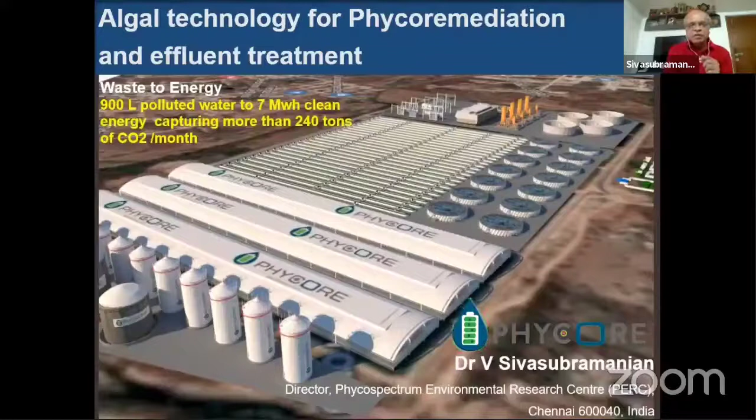So 2 weeks back I was traveling in Rajasthan. We have projects in Kota and also in Jaipur. In Jaipur, we have introduced our algal technology, and I'll talk about it later if there's time. We also have an algae-based pilot plant in DCM Shriram Limited in Kota. I think somebody's in the audience, I saw somebody from Kota. I was there in Kota 2 weeks back, and I've been traveling to Kota even before COVID. Because of COVID we couldn't come, so the first visit was 2 weeks back.

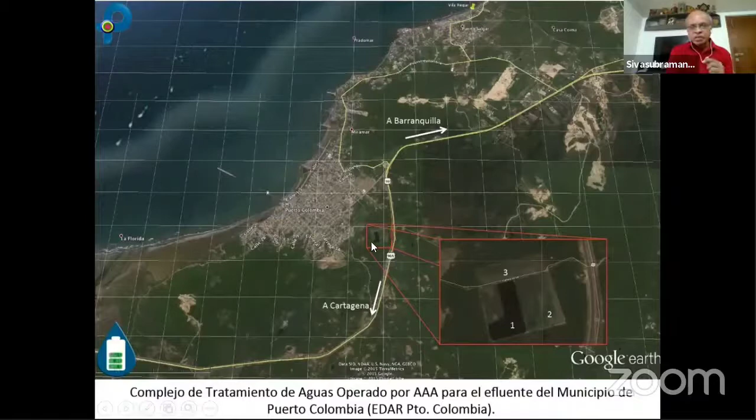This is another project we just started in Colombia. You can see a small city here called Puerto Colombia, and this is the Caribbean Sea, going to Barranquilla and Cartagena. There's a sewage treatment plant here, enlarged to show the details. We have isolated microalgae from all 3 ponds of this sewage treatment plant, and all 3 ponds have different compositions of algae. We are studying this, and we'll be entering into an agreement with this city to treat it.

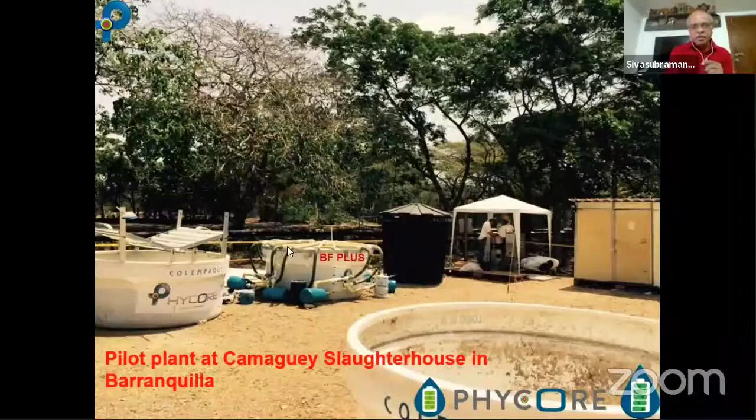We have done another project in Colombia, a Camagüey slaughterhouse in Barranquilla, where we introduced one of the reactors called BF+. I'll explain later what BF+ is. This was done very successfully, and we treated the effluent, and the biomass is now used for a bigger version coming up in Colombia, where we are treating the effluent and making biomass. I think you can see the biomass here.

The normal brown coal has 3.5 calorific value, calories per kg. Industrial effluent biomass has got about 3.4, and domestic effluent is about 3.8. So we are able to get biomass with a higher calorific value in Colombia.

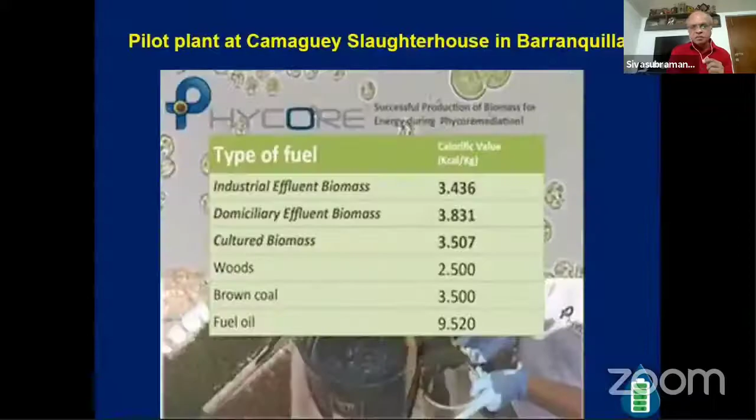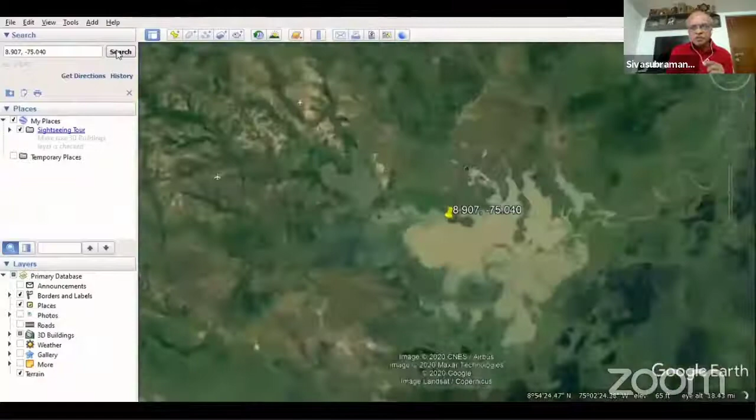This is the very latest picture you are going to see, a video running. You can see the Google map which has a video loading. So now you can see, last March I was there just before we shut down for COVID. I was there in Colombia.

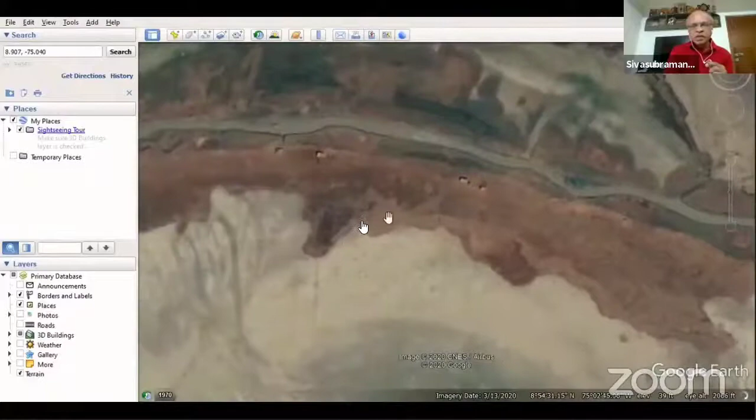So this is the canal here, and that goes to a big swamp here. I can see a big swamp, and this big swamp. I'll show you the next picture.

So we actually met these local people to tell them what we are doing, because in Colombia you first have to convince the local people what you are doing. Only then can we proceed with whatever we want to do on a large scale in the water body.

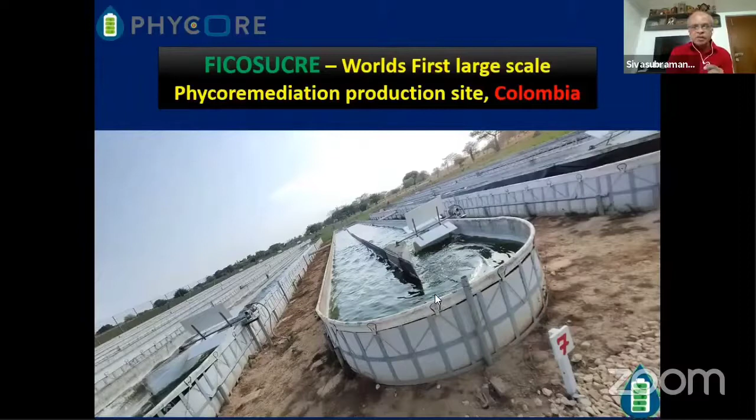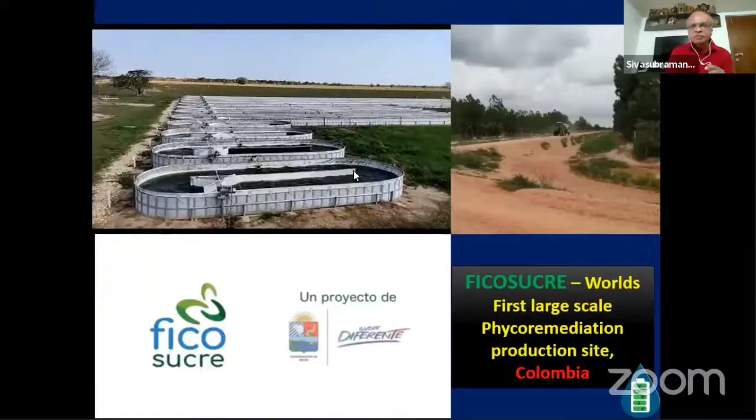This is supposed to be the world's first large-scale phycoremediation production site, where we will be growing algae collected from various sites, and then produce the biomass. You can see the facility here, and we take this algae in this... this is in Spanish, don't worry.

So we are using this tanker - it's an aerial view. We have a huge facility in Colombia where we will be producing the algal biomass, and then take it in big tankers and put it back in the wastewater.

The idea is, there are two types of algae, the beneficial algae and the harmful algae. So we try to minimize the harmful algae by increasing the number of beneficial algae, collecting them and putting them in a culture facility, a growth facility where we dose a lot of materials and nutrients, and grow them. Then we take this concentrated biomass and put it back in the wastewater, where they will be fighting the harmful algae, and also taking up the nutrients very effectively.

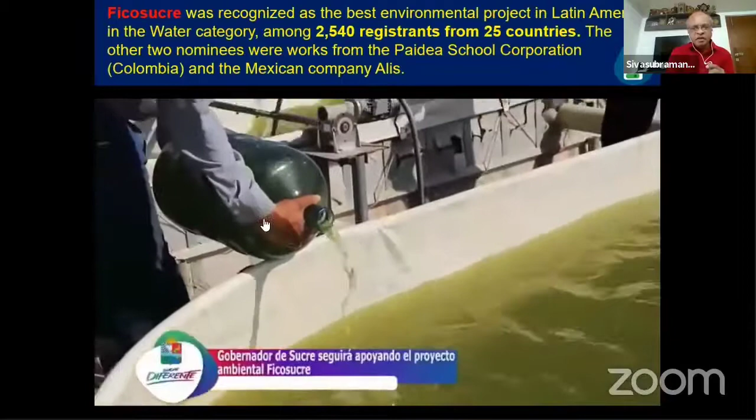After we became the winners, we became popular, and a lot of people started visiting our facility - the mayors and the local people. This is a TV commercial. This is when the governor of Sucre visited our facility, and this came in the news - a news item on TV where the governor himself is explaining our project.

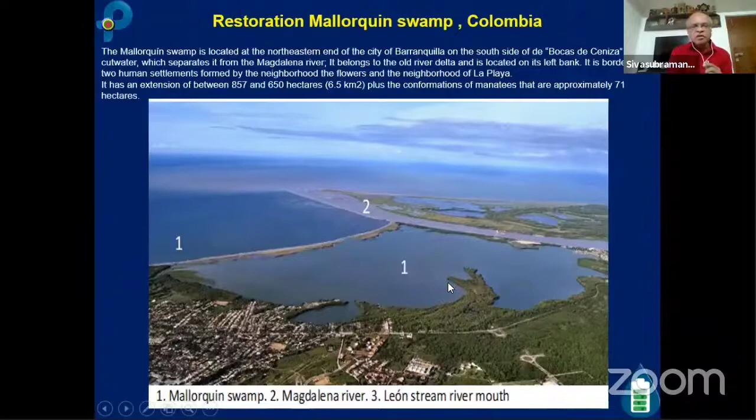Another project we just started in Colombia is swamp restoration. This is a big swamp you can see here, near Barranquilla city - the Mallorquin swamp. This is the Caribbean Sea, and this is a big river, the Magdalena River. It's situated between the Magdalena River and the Caribbean Sea, called the Mallorquin swamp. This swamp is now being cleaned up, and we have already started our project.

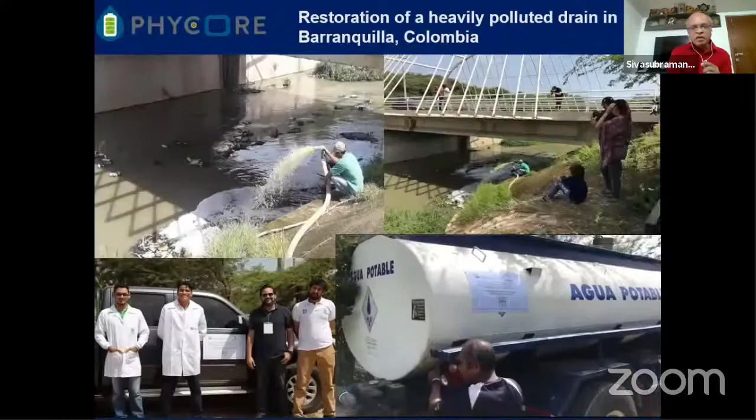This project has been very successful, and we also started cleaning up the small waterways that dump their waste, using our technology. This came in the newspaper also.

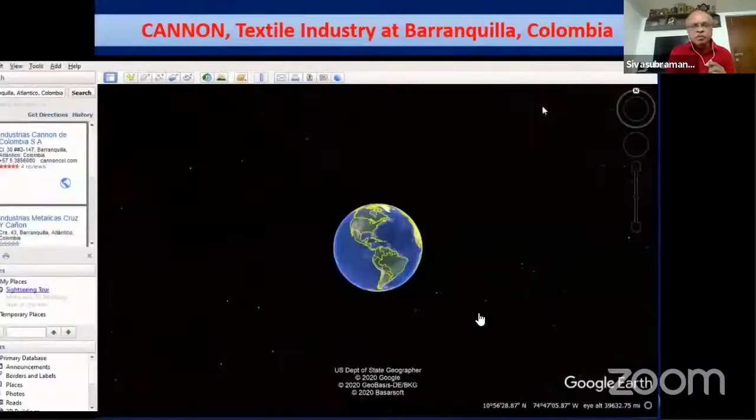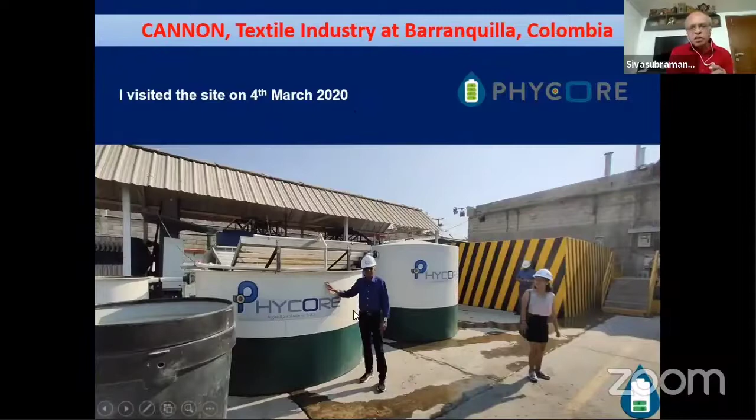This is another project we just started in one of the industries in Barranquilla, called the Cannon Textile Industry. I visited on 4th March. This is our reactor. Its importance is that this is a continuous process, first time in the world, with very good reduction of BOD, COD, color, and toxicity.

You can see the various samples. This is a raw sample, and when it goes through the system, at the end it is almost transparent, and all the BOD, COD, color, and toxicity have been reduced to a very low level. I think for the first time we have made a continuous process; otherwise you would only be doing a semi-continuous process. I'll explain this later.

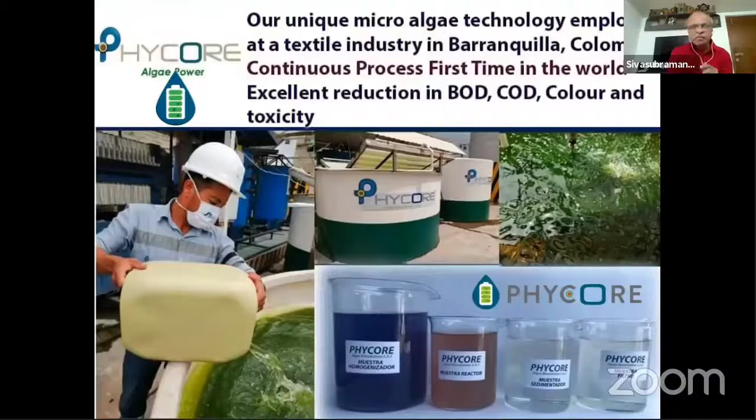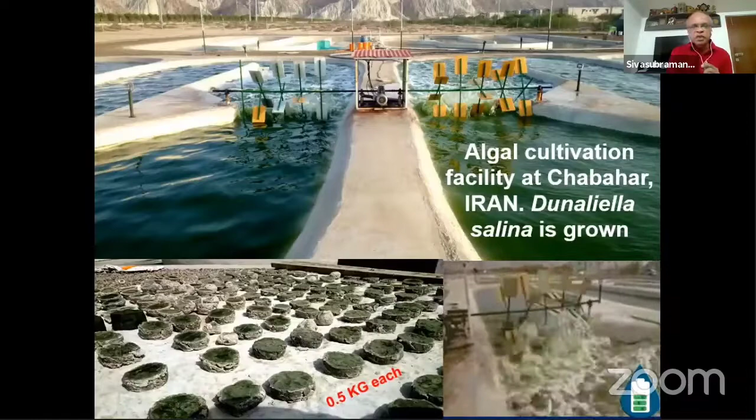There is a time gap, and this is another project we just started in Iran to produce Dunaliella, and we are also involving local industries to supply their flue gas so we can grow this biomass very effectively. Another project we just started in Wales, UK, where we have this partner.

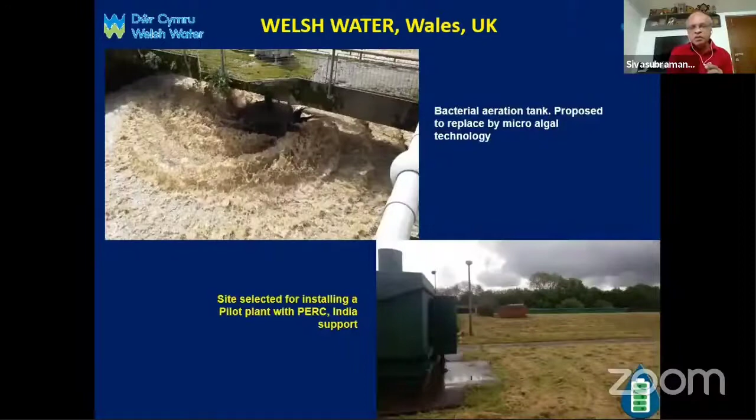This is Dr. Tajuddin from India, this is me, and this is Carol and Ella from Swansea University. They are with us, and we'll be taking up this project for wastewater treatment using microalgae. This is another visit we made to Port Talbot Steelworks, which Tata Steel has.

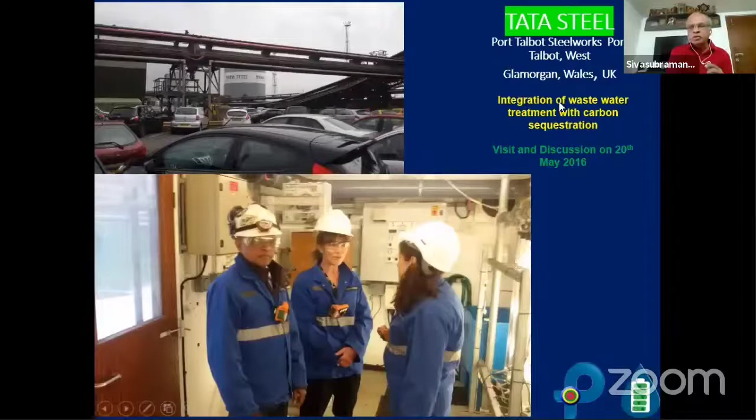After coming back to India, I was invited by Tata Steel to look into their problem in Jamshedpur. They have a big problem with color, cyanide, and ammonia removal. When the sample was sent to our laboratory in Chennai, we were able to remove the color and bring down cyanide and ammonia within 4 hours. This is after 4 hours of treatment.

This is the pilot plant we just started there, and it is almost under completion. This is where we are going to scale up.

This is the aerial view of the sewage treatment plant, a wastewater treatment plant. These are all railway tracks inside, and this is where we are going to intervene. This is a big system, about 8,400 meter cube, a huge system.

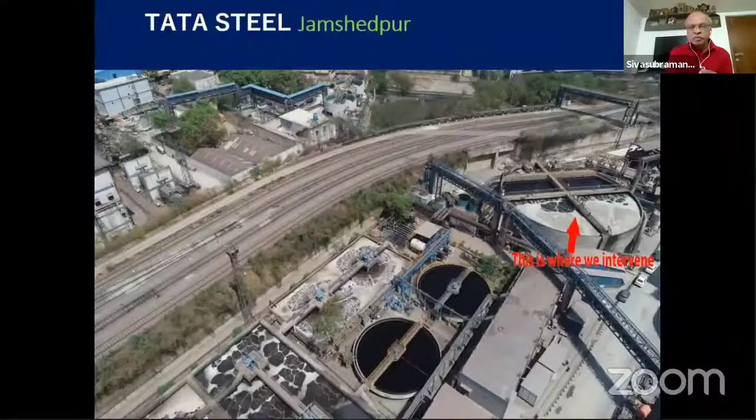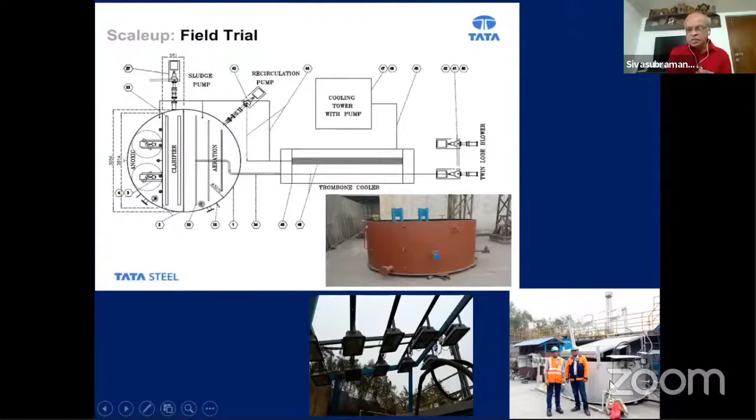We made a smaller version of this big system with all the pumps, inlets and outlets. We also fixed artificial lights. This is the 8,000 liter pilot we have completed, and it was really successful.

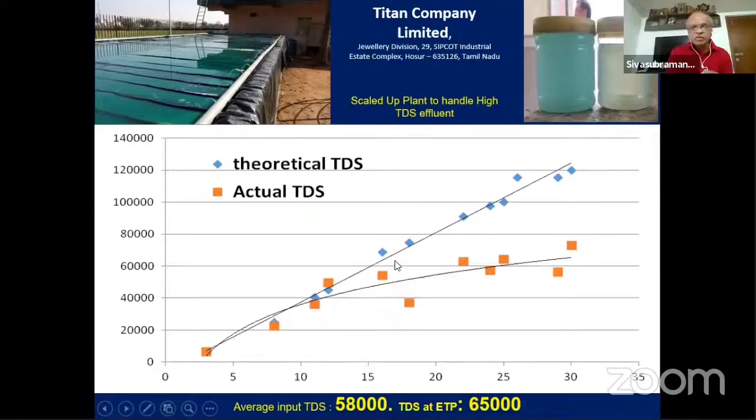In fact, we did another project in Tamil Nadu, in Titan, where we were able to treat effluent with about 58,000 TDS, and the TDS in the ETP goes up to 65,000. It's an evaporation process where we are able to remove the TDS, and this is the scaled up plant we put up in Titan, the jewelry division, part of the Tata company.

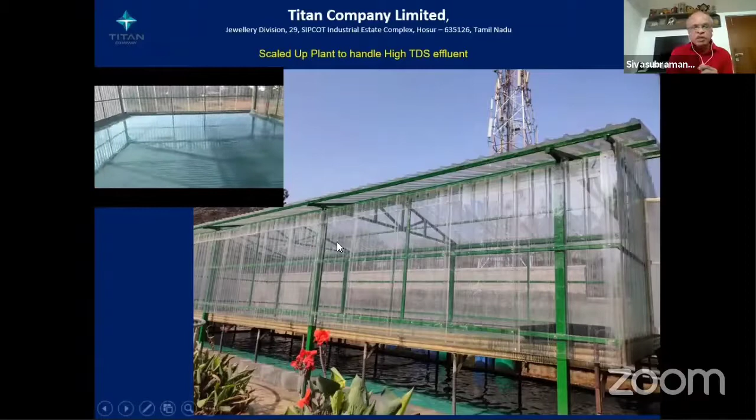This is a 40,000 liter pilot plant we have started. This is an evaporation surface, surface 1 and surface 2. We are actually adding 5,000 to 10,000 liters to the 40,000 liter tank here. I will explain the process a little later.

We are also working on other projects like lakes, ponds, rivers, and streams, and other evaporation treatment in India and other countries.

So this is basically the algae power. The diagram explains it: it oxygenates water, eliminates waste, degrades organic and inorganic pollutants, eliminates all harmful bacteria, and promotes biotic life in a natural way.

This is what we are actually putting into natural water bodies, because when you compare a natural water body and industrial effluent, the treatment is completely different. For industrial effluent, we give 99% artificial and 1% nature, whereas in a natural water body, river, pond, lake, or swamp, we give 1% artificial and 99% nature. So this is basically our technology—we have developed a product called Phycoplus.

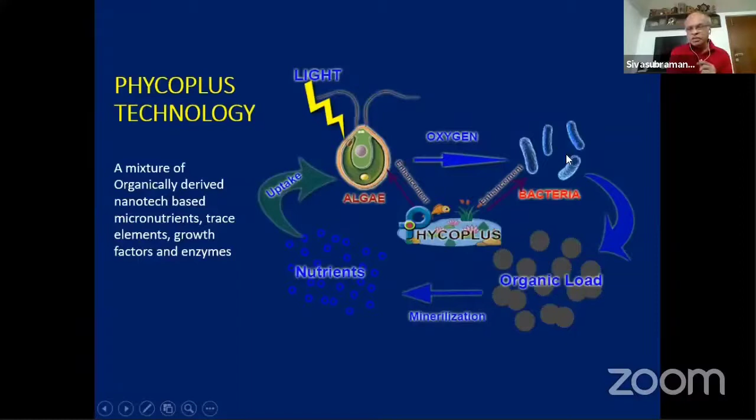It's a mixture of organically derived nanotech based, micronutrients, trace elements, growth factors, and enzymes that, when applied, enhances the production of algae and bacteria. The bacteria degrade the organic load and are mineralized, and the minerals are taken up by algae. Algae, using light, taking up nutrients and fixing carbon dioxide, evolves oxygen, which is taken up by bacteria. This is the cycle we are talking about in the technology we normally use.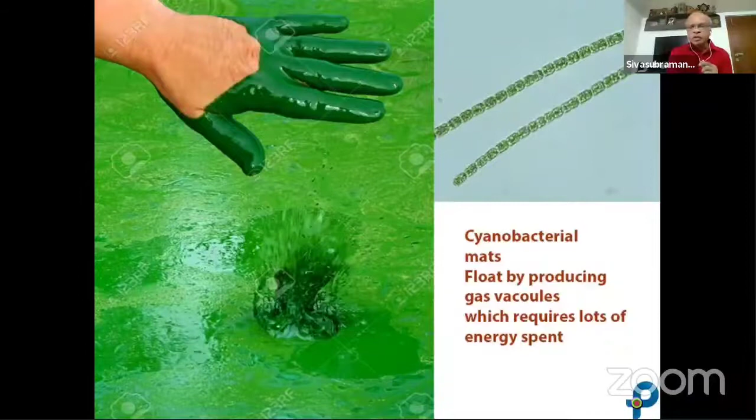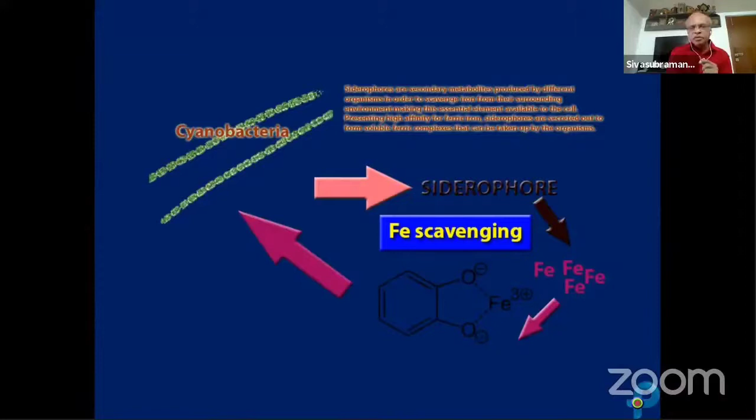In lakes, normally you will see bacteria growing in large numbers, completely covering the surface and cutting the light. I think they also produce siderophores that scavenge iron, and this iron scavenging makes cyanobacteria dominant and prevents other algae from taking up iron. So iron is completely cut off because of this iron scavenging by cyanobacteria.

So we remove this cyanobacterial and duckweed mat with our technology and allow the light to penetrate. Once the light penetrates, water becomes transparent, BOD and COD become low, oxygen levels are optimized, coliform and other harmful bacteria disappear, and the normal food chain is restored. So this is what we do.

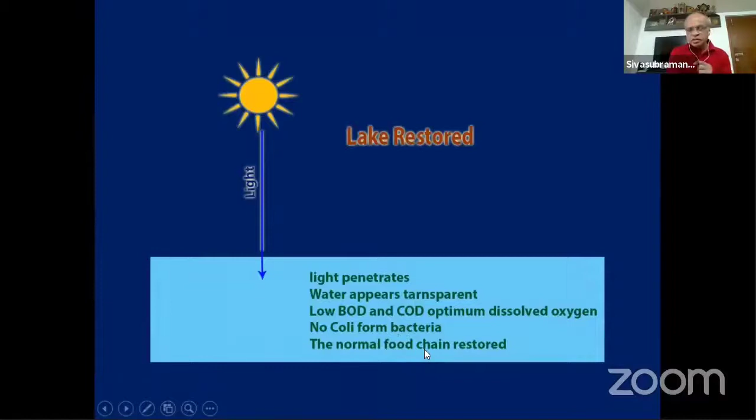This is what we started in North India. Near Aligarh, we were given a project to restore a lake.

It's a lake, you can see on the screen, and when we start adding our product along with the microalgae we are growing there, with our Phycoplus, you can see this before and after. Before, it's completely covered, the water is black and foul smelling, and after a week or so, you can see the water becoming transparent, and you can see the bottom of the lake.

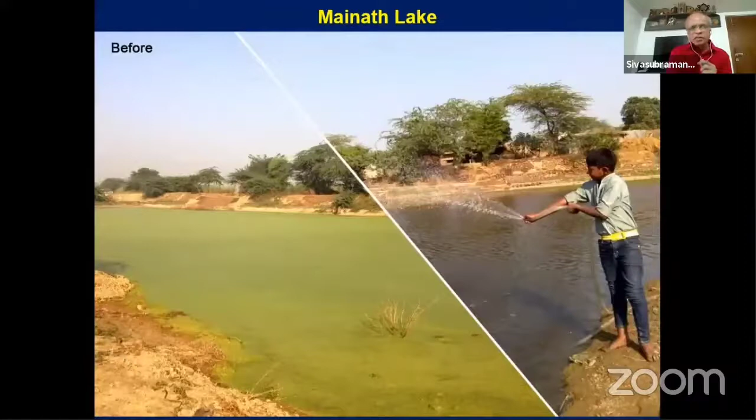The cyanobacterial mat has completely disappeared. And if you look at the parameters, BOD, COD, and especially E. coli and total coliform bacteria are completely gone, and the water becomes transparent and restored.

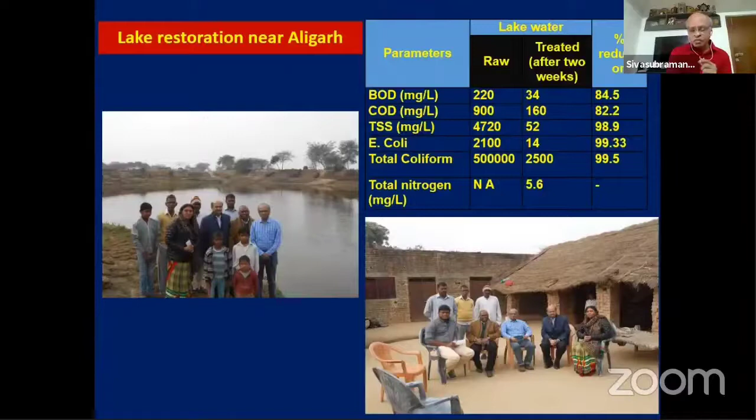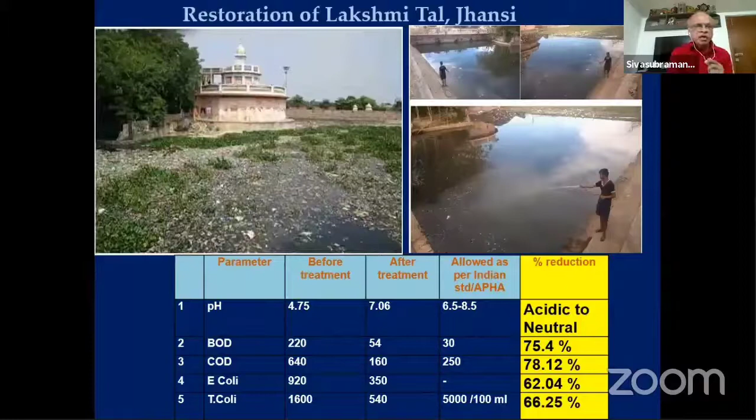So this is what we demonstrated near Aligarh, for taking up a project under the Ganga Mission. But the Ganga Mission people said, okay, you have done something with the pond, but the Ganges is running water, we're talking about a different scale. So we did other projects in temple tanks as well.

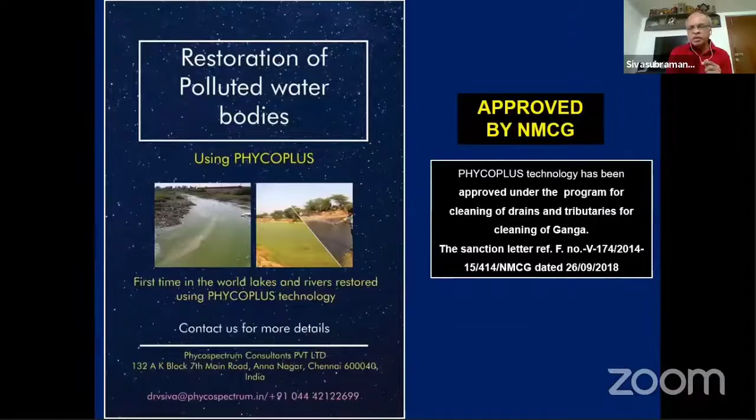We also got a project from the National Mission for Clean Ganga for treatment of the Pulauti drain in Pulauti. For the first time, this Phycoremediation technology has been approved by the Clean Ganga Committee, and we started this in this village. These are all the other projects we started in other places.

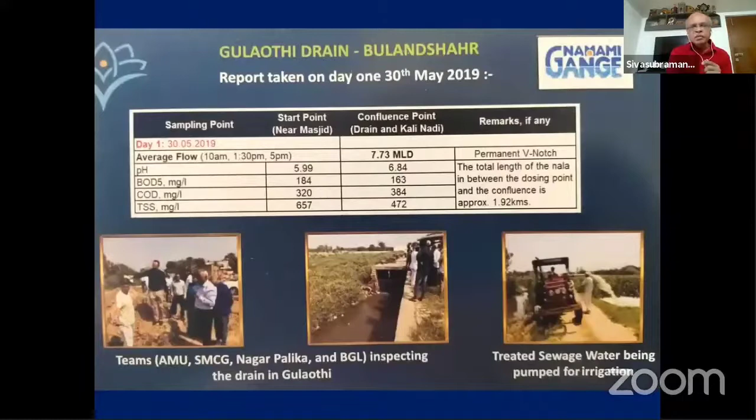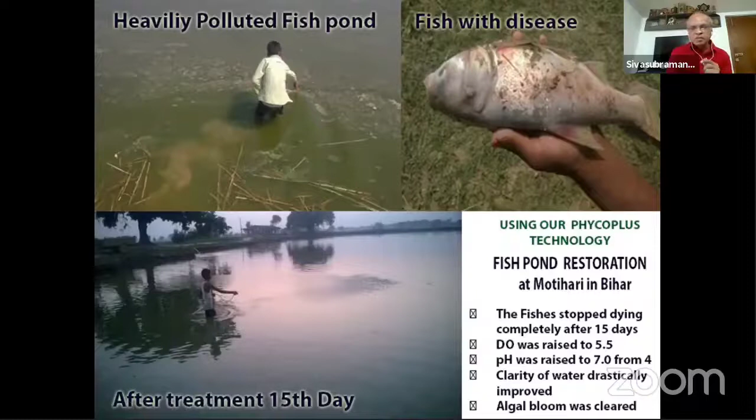In Bihar, we restored a polluted lake where fish were dying due to disease. By about the 15th day, you can see the water becoming transparent, less greenish, and the fish started moving very well, and the disease disappeared.

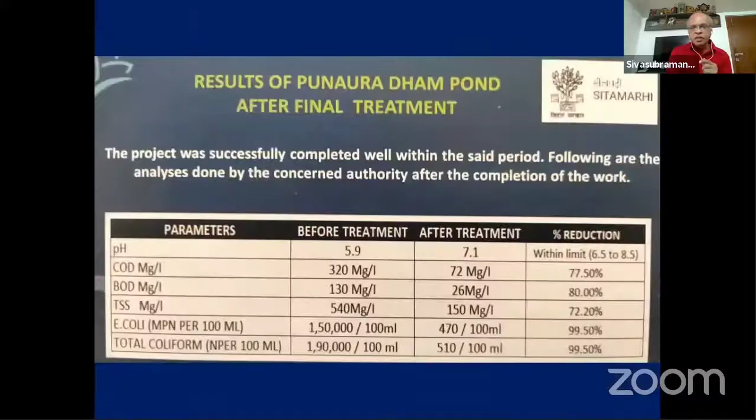This is another project we did in Bihar, in Sitamarhi, Punaura Dham Pond, and another project as well. You can see within 15 to 20 days, we are able to restore these ponds with the treatment we call Phycoremediation treatment.

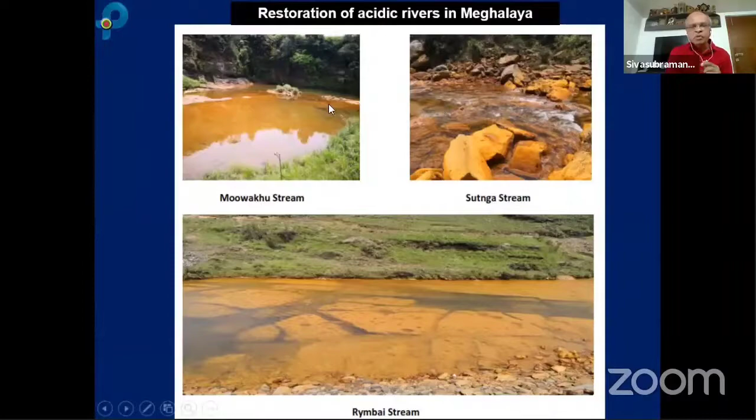This is another project we started just before COVID, in Meghalaya. You can see most of the rivers there are polluted by mining activity going on, with a lot of mining and coal mines, and the sulfuric acid produced by the mining enters into the river.

You can see the sulfur coating on the rocks, and the water appears transparent because nothing grows there, since the pH is around 2.5 to 3.5. Nothing grows, so we have been given one of the rivers to restore.

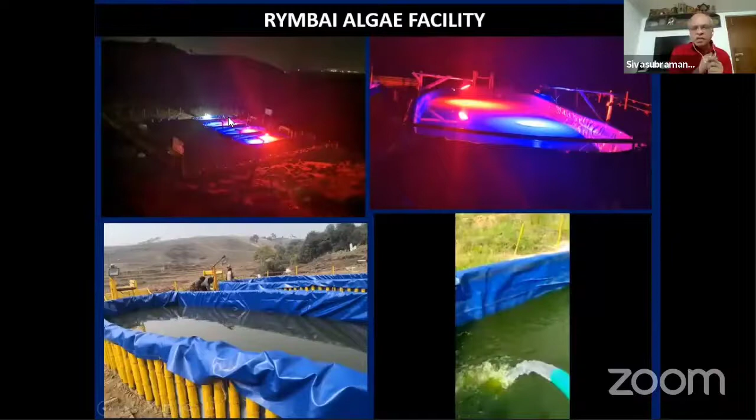We just started a facility there. You can see these raised pond facilities at night with artificial lights, and this is during the daytime. We started this project just before COVID, and it is going on. We started dosing on the 10th of November. This is the check dam we created at three or four places to grow algae, and we introduce algae into this.

Check dams were created at 4 locations spanning up to 1.2 kilometers, holding about 7 lakh liters of water where we'll be developing microalgae. The pH has been corrected to more than 7, and we encourage local people to come and wash their clothes there, since otherwise they would avoid the water because it's very acidic, around 2.5 to 3.5. Now that the water has become more than 7, we supply them with soap so that the rest of the water downstream also gets utilized.

So this is the latest picture that I can show.

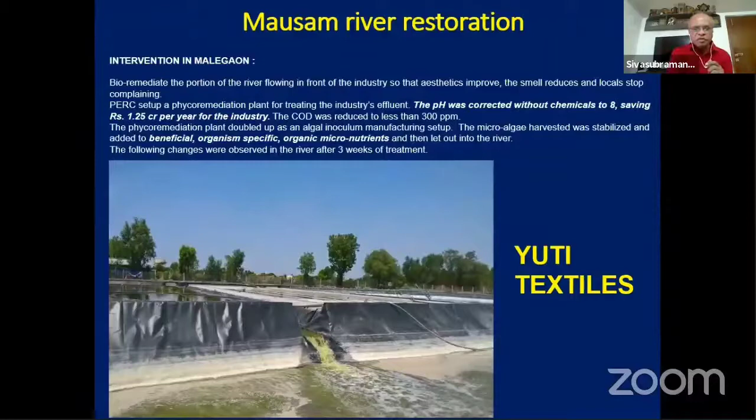Before we got this Ganges project, we also restored a river in Malegaon called the Mausam River. We engaged with Yuti Textiles near the river, who had been dumping textile waste without any treatment. So we engaged with them and put up a large-scale treatment system, and this treated water along with algae is let into the river.

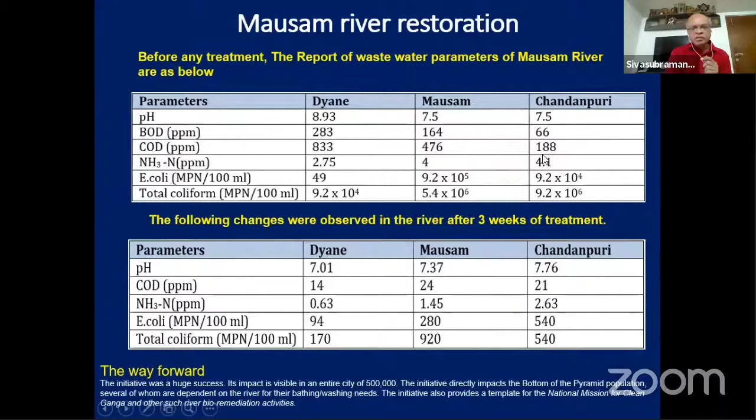The moving water carries the algae that we are adding, and as the algae is carried along, the treatment happens. The more distance it travels, the more effective it becomes. We are able to follow it up to 10 kilometers, where the 188 COD becomes 21 — an excellent reduction. We submitted this to the people, and we got a project in Gulaothi.

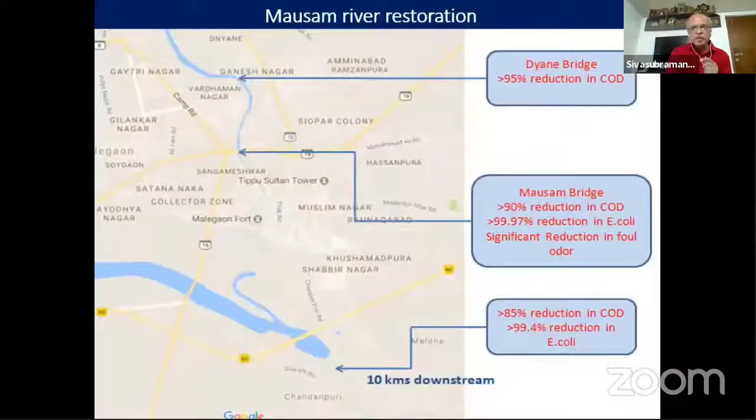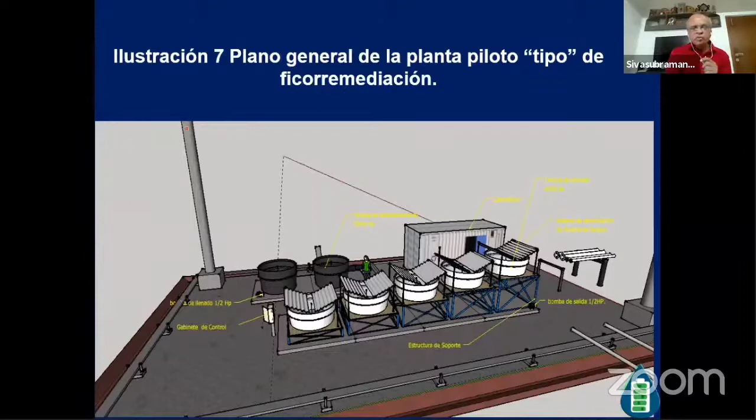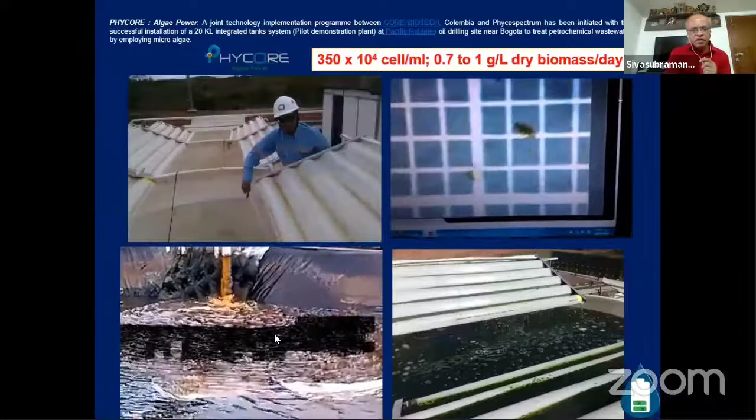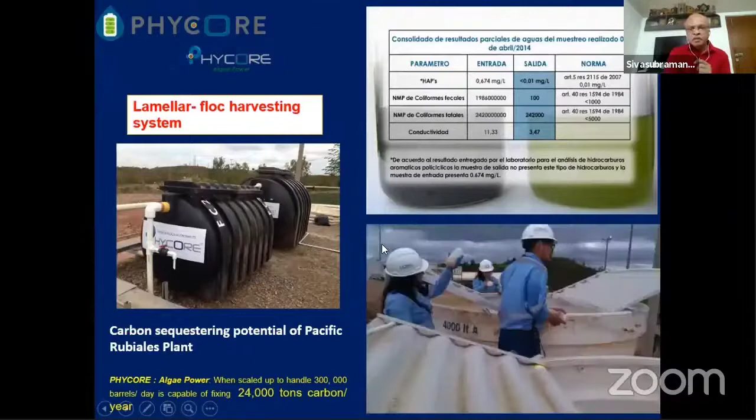This is another project — I think I told you about the Pacific Rubiales project we did in Colombia. This is the aerial and pictorial view of our plant, giving an idea of the continuous system of tanks we are using. This is where we did our pilot, this is our group, and this is the effluent from the petrochemical waste. We were able to reduce the parameters, especially coliform bacteria and nutrients, before dumping it into the river.

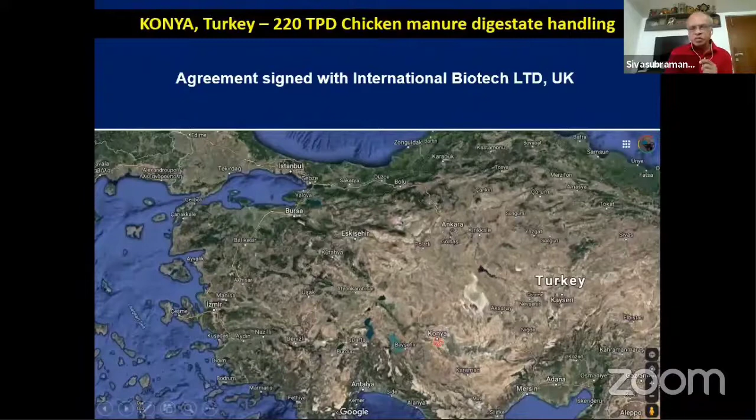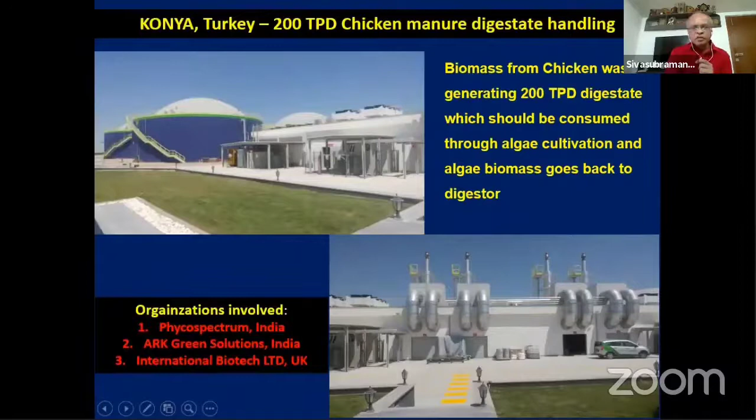We have another project that we just started — I'm not able to travel there, it's in Turkey. This is biomass from chicken waste generating around 200 TPD digestate. The digestate is basically used by algae to grow, and we will be treating the waste and producing algae, which goes back into the digestion unit where they will be producing power.

Through all these pictures — I think it's 11:04 now. I can stop here and ask people to shoot questions. We can answer them, and in the meantime I'll go through the rest of my slides.

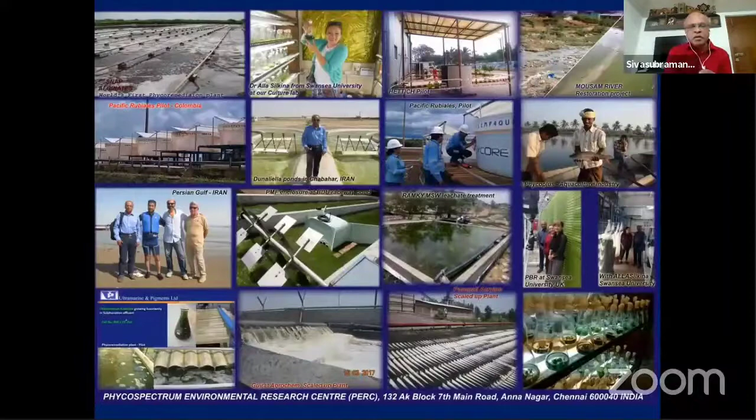So these are all some of the companies we've worked with.

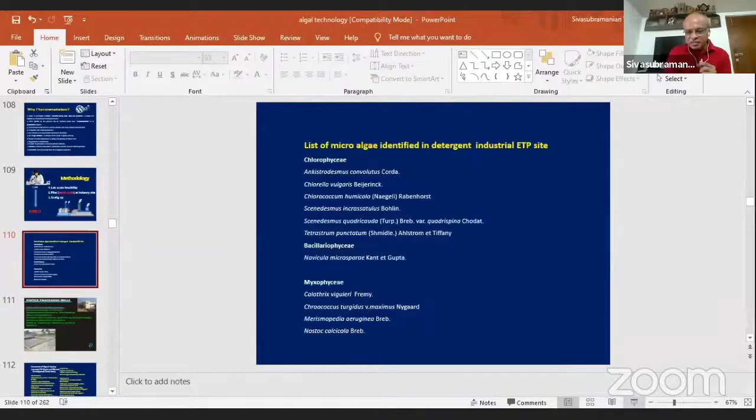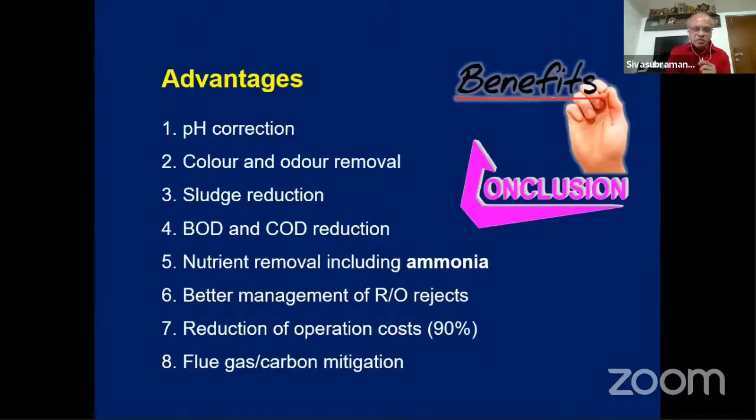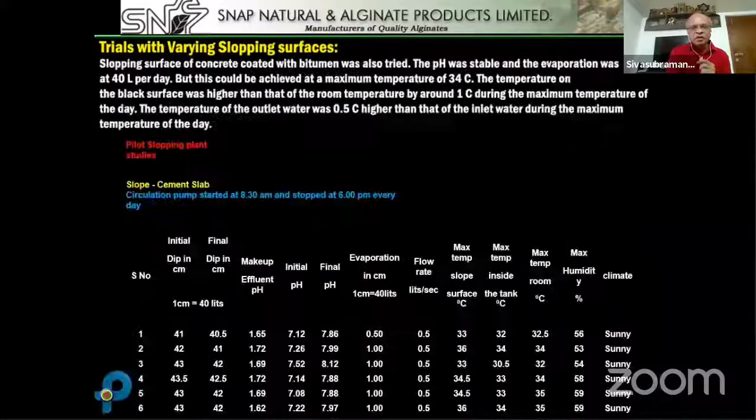So this is our first project. We started this work some 15 years back in Tamil Nadu. After that we entered into agreements with a lot of companies in India and other countries. The major countries are Sweden, Turkey, and Italy, and major projects in Colombia. So we have a joint venture company in Colombia.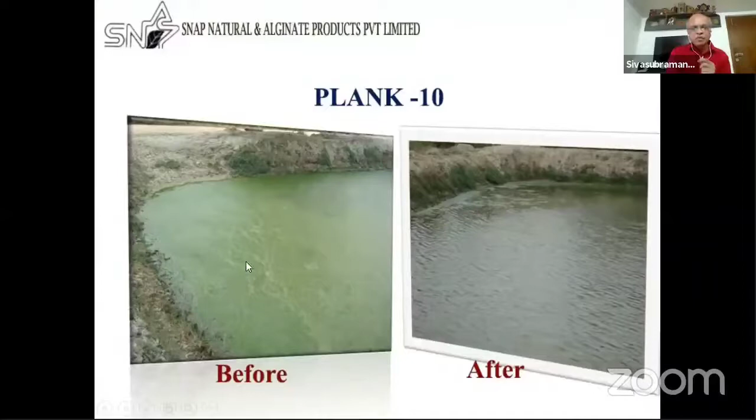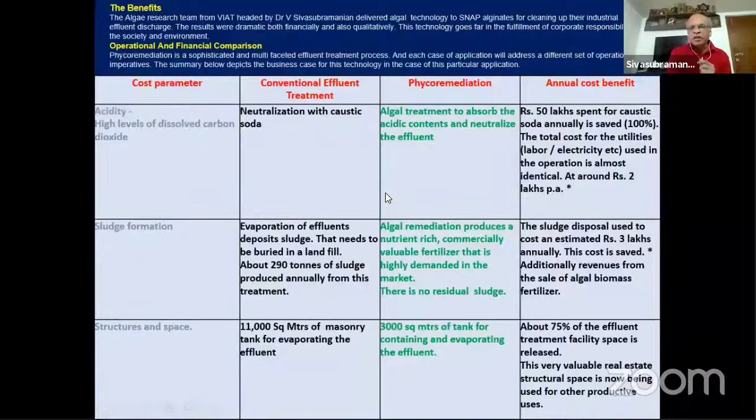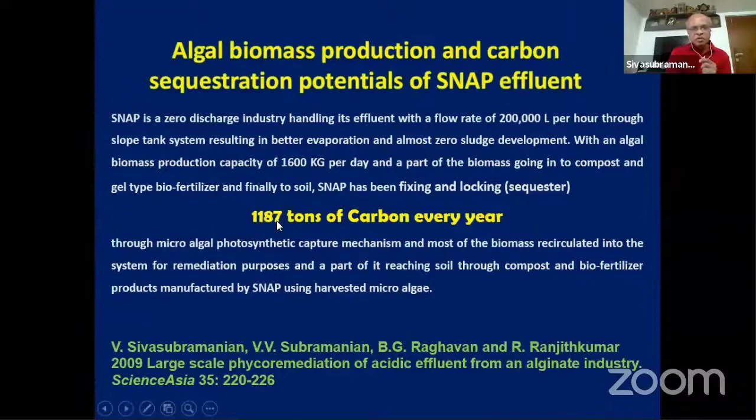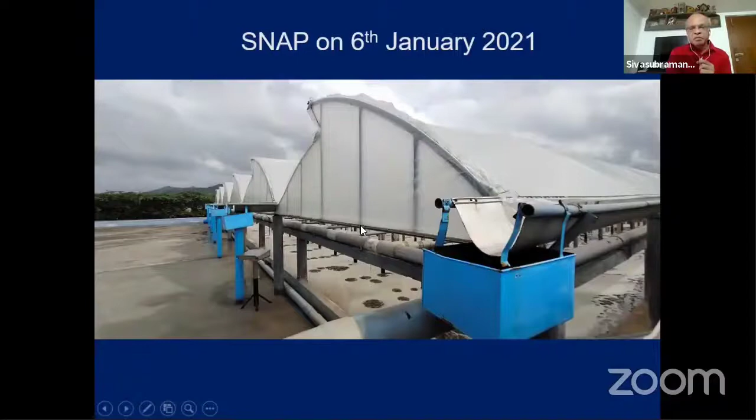We were able to remove, in the first project in SNAP in Tamil Nadu, 1,200 tons of carbon every year. This latest picture that I took last month, on 6th January, I was there—they have improved the whole facility. I will explain this if somebody asks a question. So we go on improving the facility that we have put up. This facility was put up very recently, but we started the project in 2002, 2003.

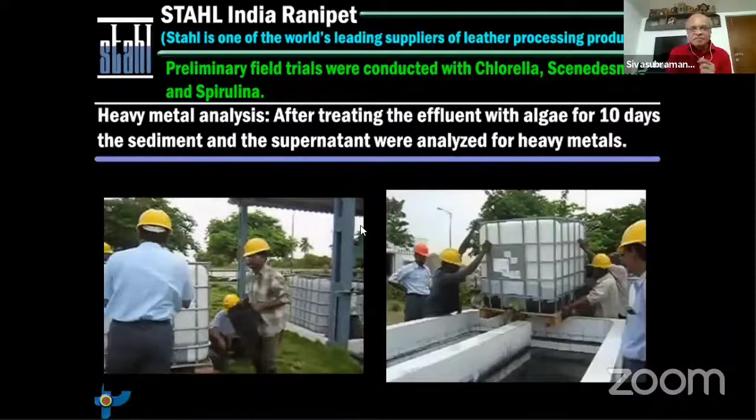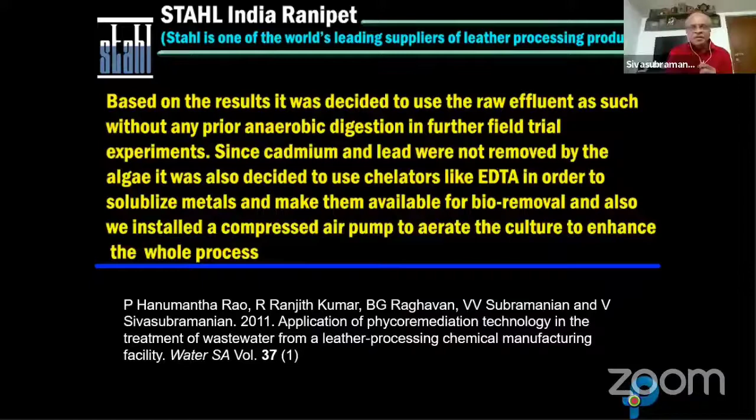Please ask. Sir, I want to know the name of the common algal species we can use in wastewater treatment.

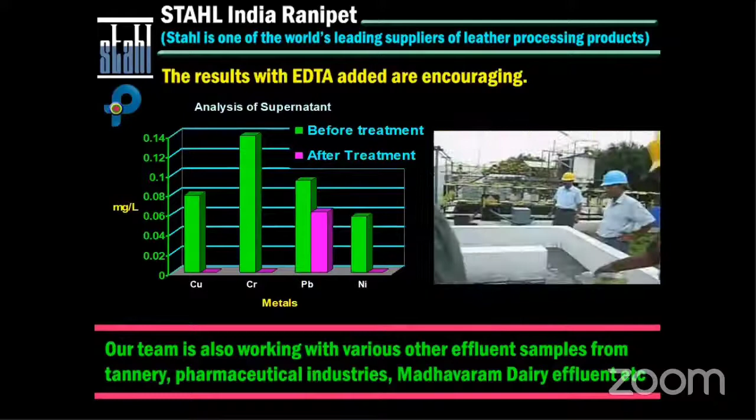That is a very good question, in fact I expected this. Actually what we do is wherever we go to the industry, we try to collect algae from there itself, mostly from the wastewater that is there, which is already acclimatized to the local conditions. We bring them to the laboratory, grow them in large scale, and then put them back into the system so that the local algae will start growing. We're not introducing anything new; very rarely do we introduce algae from some other place. So algae like Chlorella, Scenedesmus, Chlorococcum, and Desmococcus, Desmococcopsis, Oocystis—these are all species that we have been using in various places. In fact, the first project we used Chlorococcum, and in some places we also used Gonium, in UK and in Colombia.